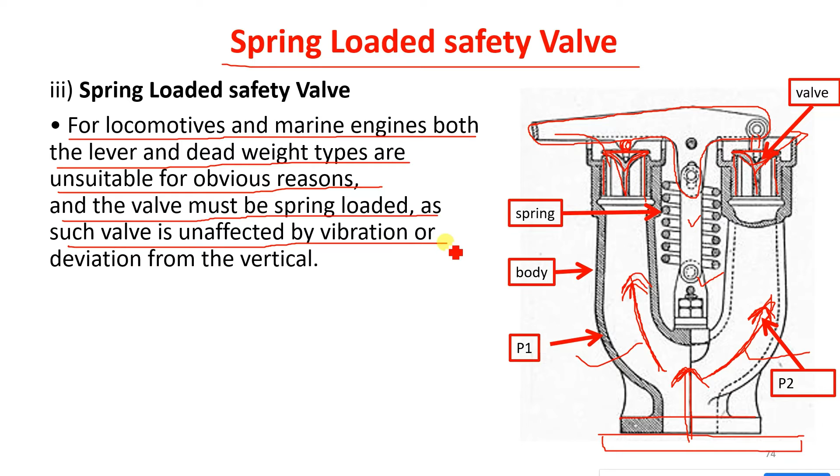For locomotives and marine engines, both the lever and deadweight safety valves are not suitable for obvious reasons, and the valve must be spring loaded, as such a valve is unaffected by vibration or deviation from the vertical.

Description of the spring loaded safety valve. It is loaded with the spring instead of weight. Here you can see it is loaded with a spring instead of weight. Hence it is called a spring loaded safety valve.

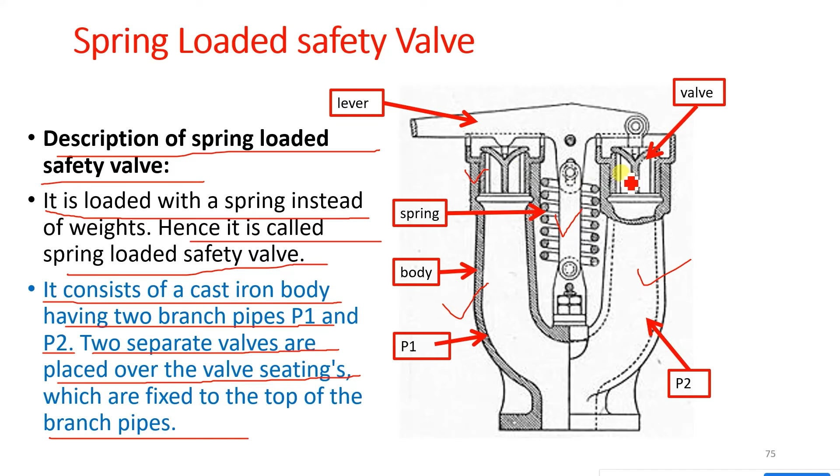It consists of a cast iron body having two branch pipes, that is P1 and P2. Two separate valves are placed over the valve seatings, which are fixed to the top of the branch pipe. Here you can see two valve seats are available on the pipe.

A lever is placed over the valves by means of two conical pivots. The valves are fitted with the pivots on the lever. The lever is attached to the spring at the middle. Here you can see the lever is attached to the spring at the middle.

The spring pulls the lever in the downward direction. By the natural reaction of the spring, it pulls the lever downward. The lower end of the spring is attached to the valve body by means of a shackle.

Thus the valves are held tight to their seat by spring force. So normally it is in the closed condition. Because of the spring action, the valve is closed tightly.

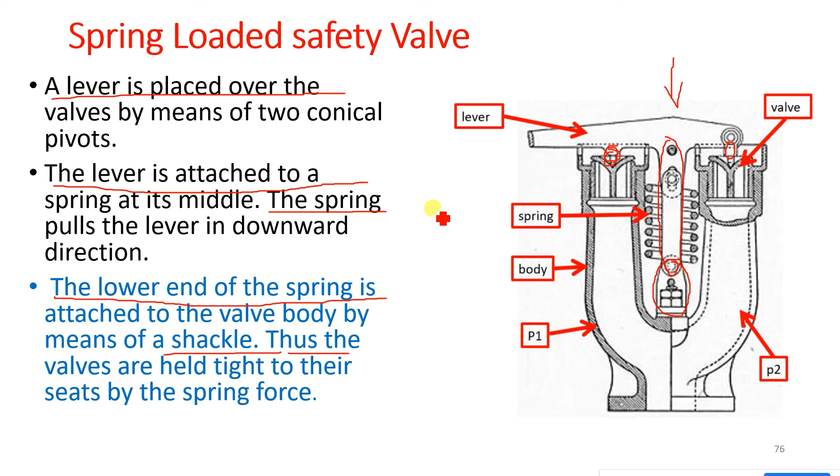Working of spring loaded safety valve. When the steam pressure exceeds the normal working pressure, the valves rise up against the action of the spring and allow steam to escape from the boiler till the pressure in the boiler reaches the working pressure.

When the steam pressure of the boiler exceeds the working pressure, it overcomes the inertia of the spring, and lifts the valve, creating an opening for steam to escape.

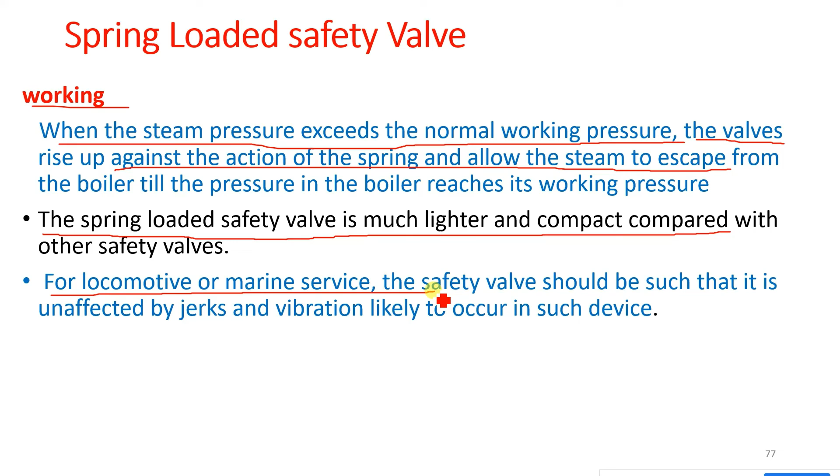The spring loaded safety valve is much lighter and compact compared with other safety valves. For locomotive or marine service, the safety valve should be such that it is unaffected by jerk and vibration likely to occur in such devices. Hence, spring-loaded safety valve is preferred for locomotive and marine services in addition to stationary boilers.

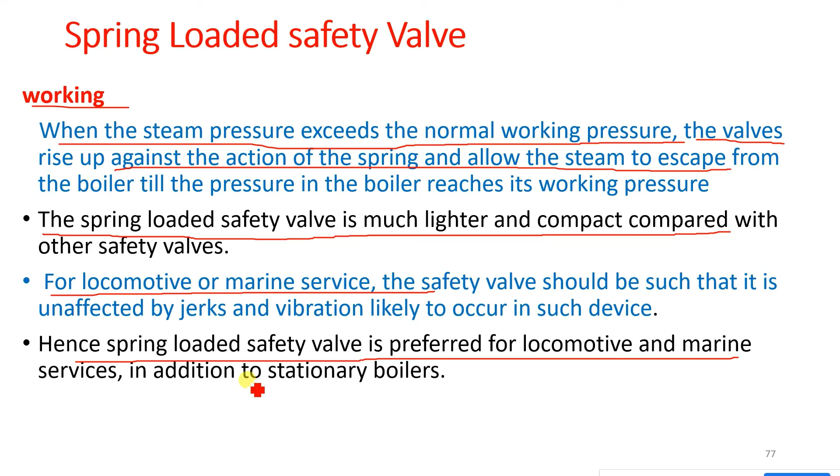Now, disadvantages. One disadvantage of this valve is that load on the valve increases as the valve lifts, so that the pressure required just to lift the valve is less than that required to open it fully.

Whenever the pressure of the steam exceeds the working pressure, it overcomes the inertia of the spring and lifts the valve. But as the spring expands, the force required to expand it further increases continuously.

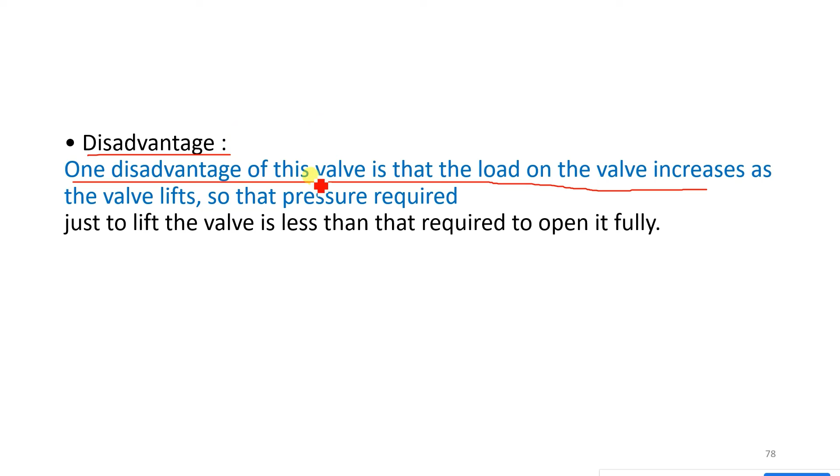That is the problem with the spring loaded safety valve. Okay, this is the simple diagram of the spring loaded safety valve.

This is the body. One end of the spring is attached on the shackle with the body. The other end is connected with the lever. Steam enters from this direction.

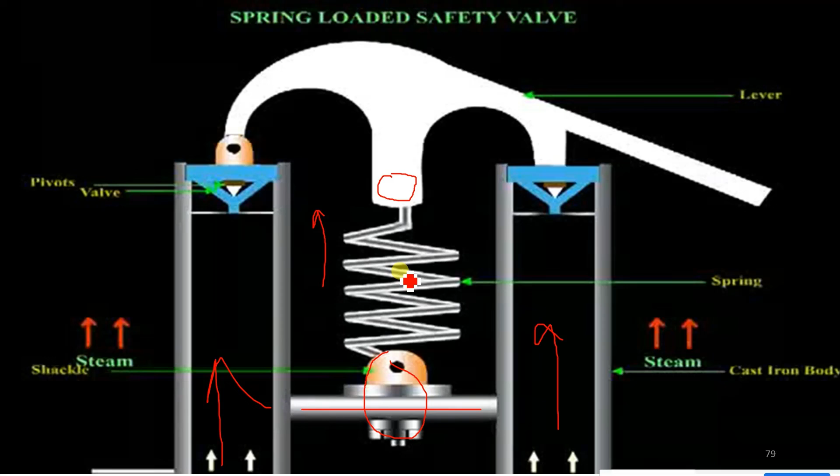When the steam overcomes the inertia of the spring, the valve lifts up. But as the spring expands to lift up the valve, more and more force is required to lift the spring or expand it further.